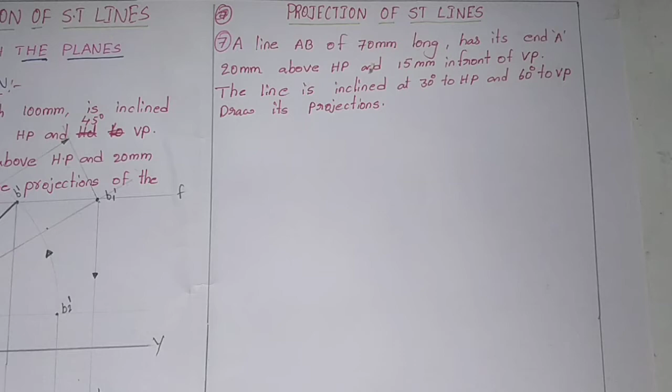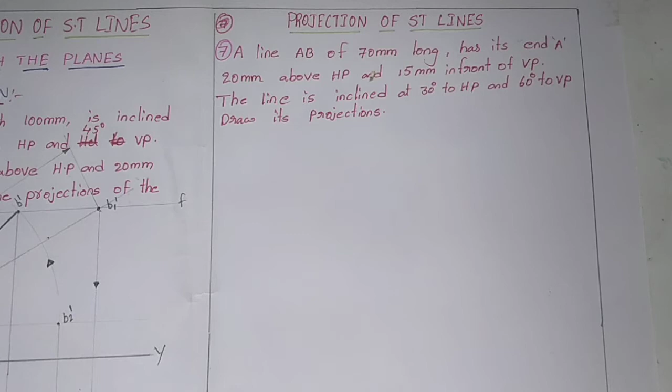Today I am going to explain how to draw the projection of a straight line when the front view and top view will get a straight line. When we get the projection of a straight line where front view and top view are a straight line, that means the angle, that is the inclination, between the true length of line AB with respect to HP and VP is 90 degrees. That means theta plus phi equal 90 degrees.

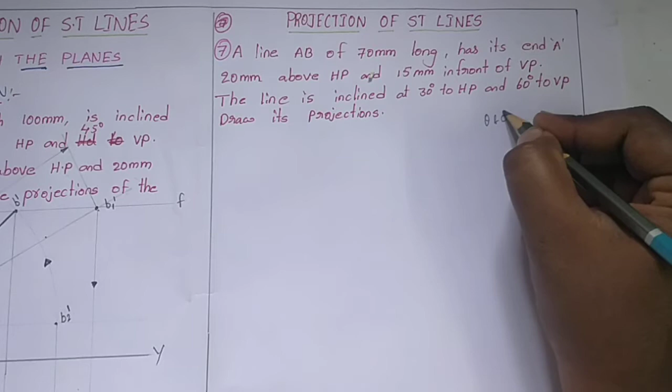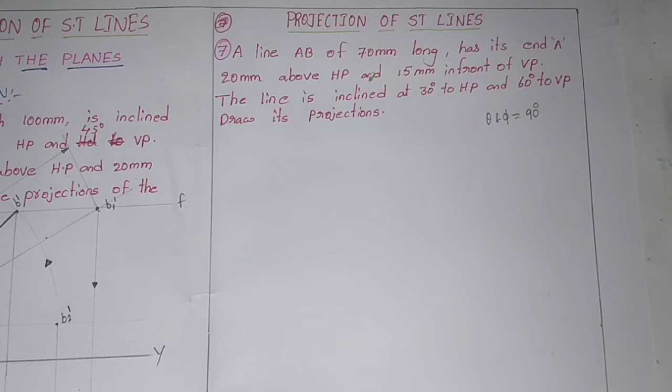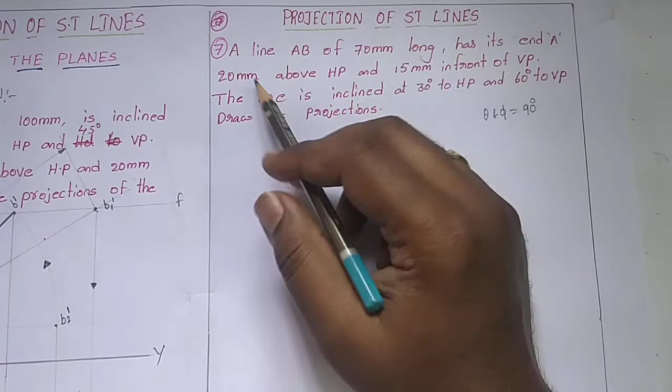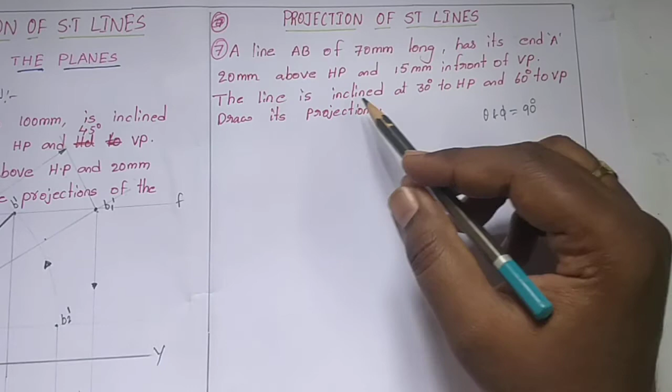At that time, the front view and top view projections are in the same line. That means A dash, B dash and A, B are in the same line. Okay. First go through the problem. Here the problem given is that a line AB of 70 mm long has its end A 20 mm above HP and 15 mm in front of VP. The line is inclined at 30 degrees to HP and 60 degrees to VP.

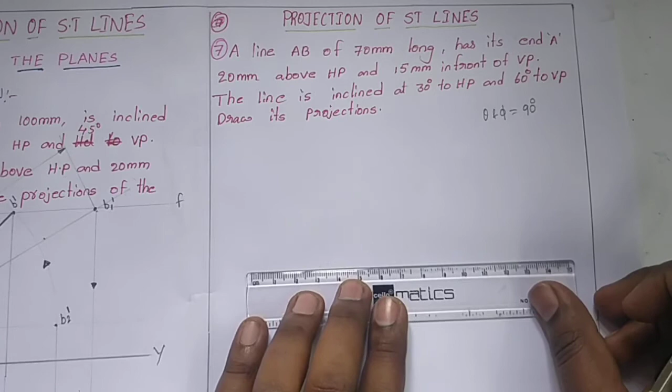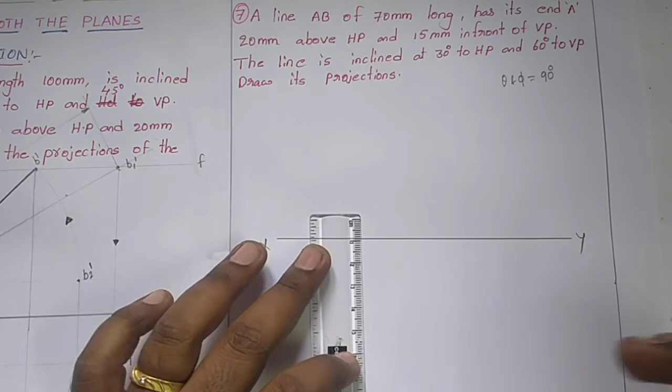Draw its projections. First, draw the XY line. Next, take any point on this. First, draw the 20 mm above HP line. Identify 20 mm above HP and 15 mm in front of VP. These are the points. It is A dash and this one is A. Now we identified the front view and top view of the start point of line AB.

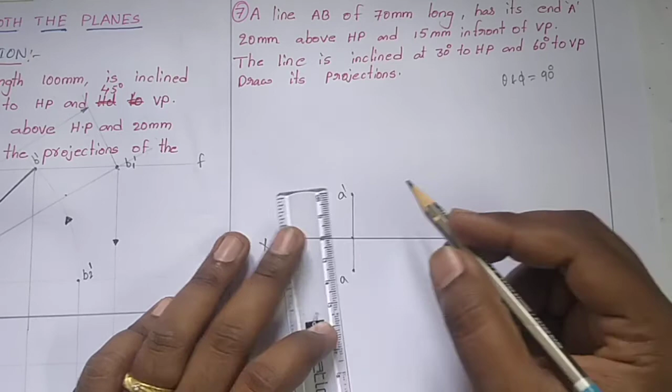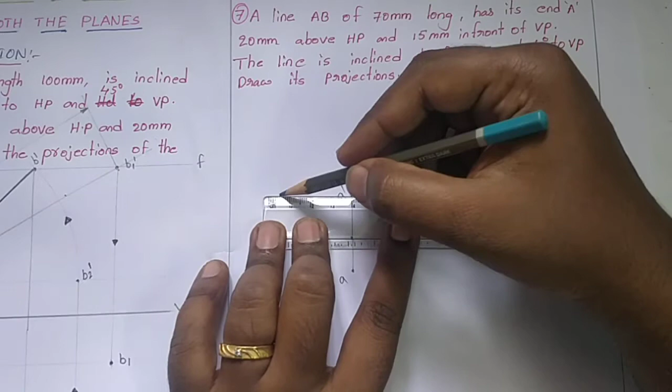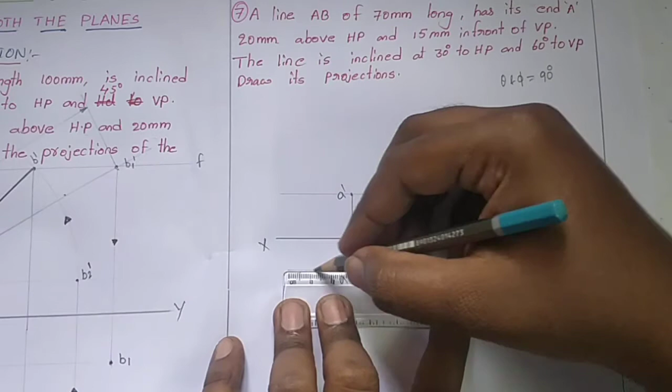Next, we need to identify the end point of line AB. For that, first we need to draw one horizontal line parallel to XY. It is known as locus of A dash. Next, similarly, draw one horizontal line parallel to XY through point A. It is known as locus of A. Next, 15 mm and 20 mm are completed.

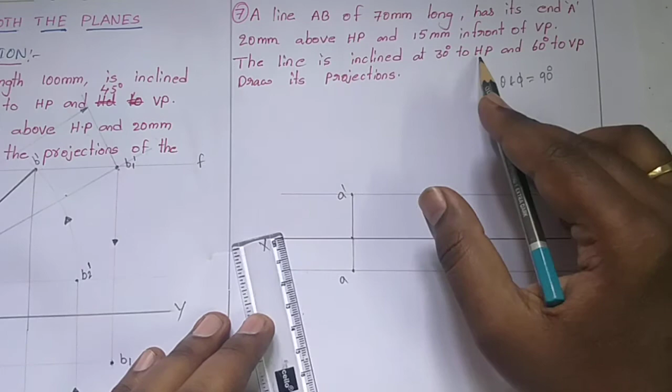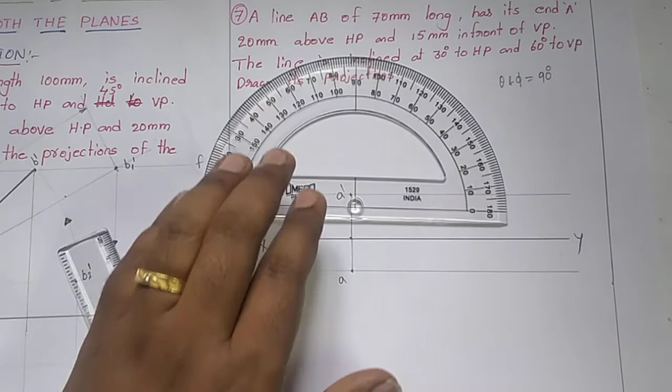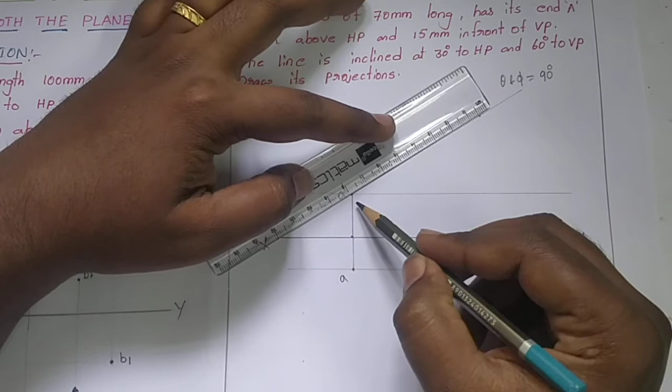Next, the line is inclined at 30 degrees to HP and 60 degrees to VP. 30 degrees to HP means we need to mark a 30 degrees inclined line from A dash. We need to draw the 30 degrees line. Okay, it is the 30 degrees line. On this line we need to measure the length AB, 70 mm. Okay, it is the 70 mm line.

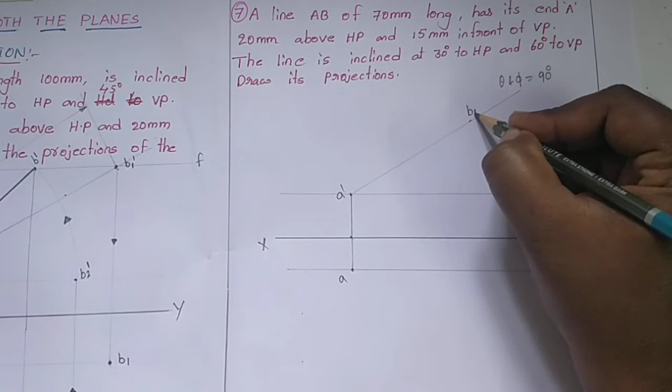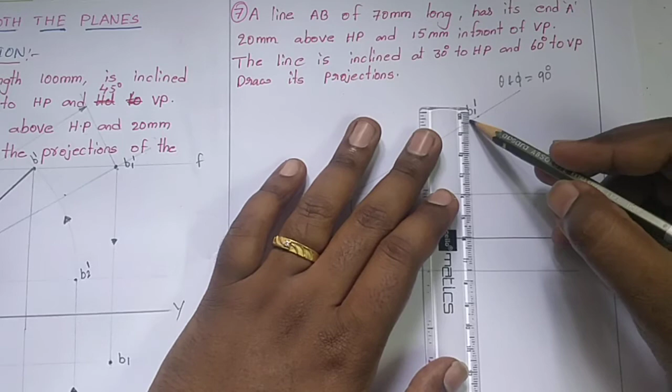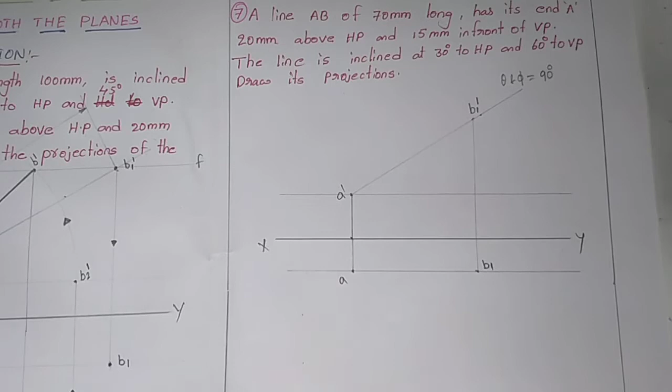This point is B1 dash. Next, from B1 dash we need to draw one vertical projection up to locus of A. We got one point. That point is known as B1. Next, we need to draw one horizontal line at point B1 dash parallel to XY. This one is known as locus of front view.

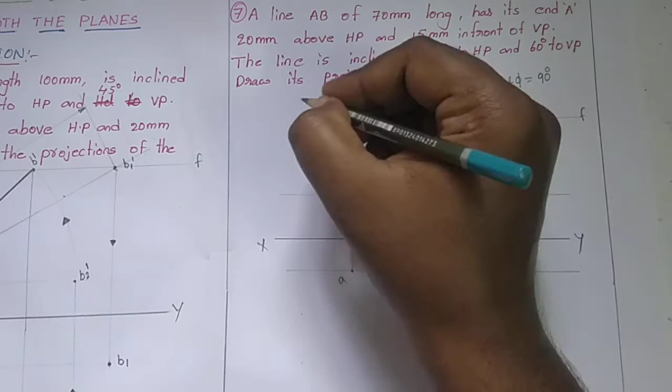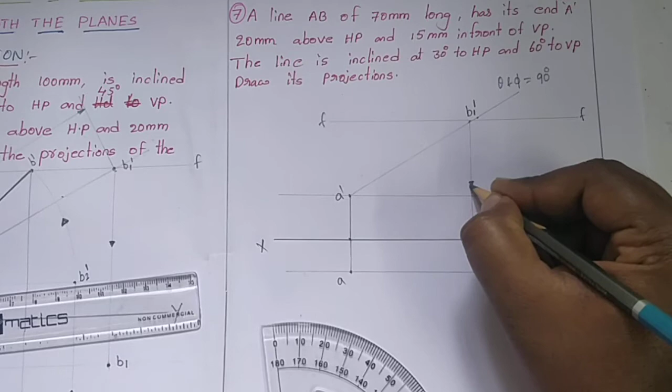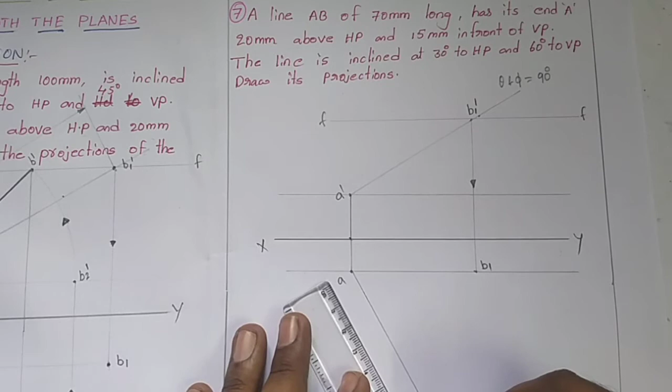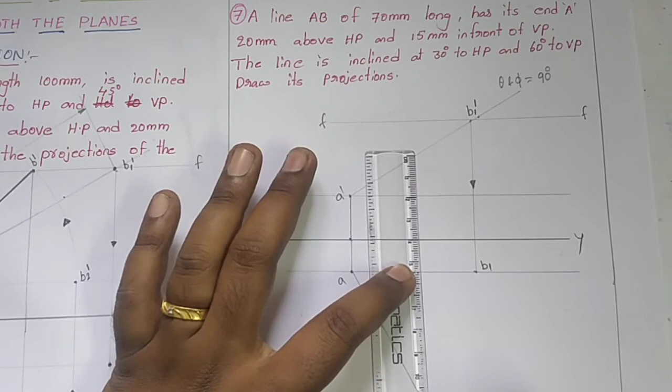Next, similarly, we need to draw a 60 degrees line from point A. On this 60 degrees inclined line, we need to mark 70 mm length. This point is known as B2. From B2, draw one vertical line perpendicular to XY up to locus of A dash. This point is known as B2 dash.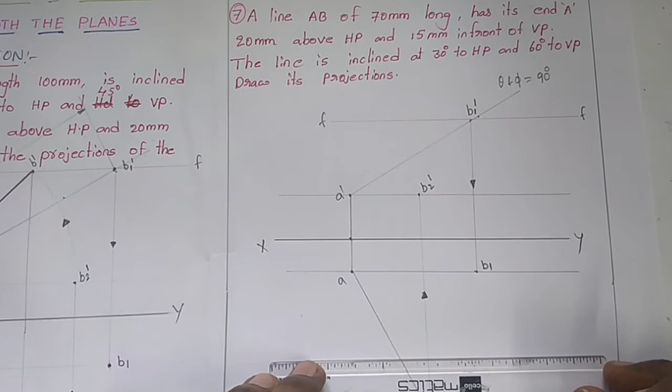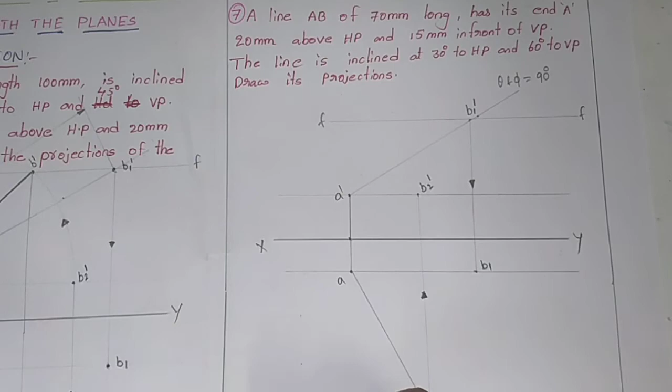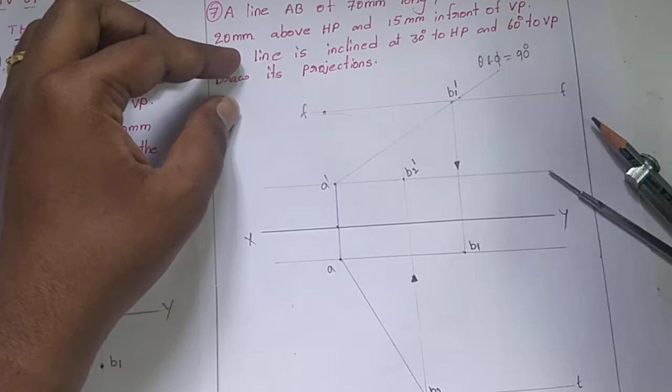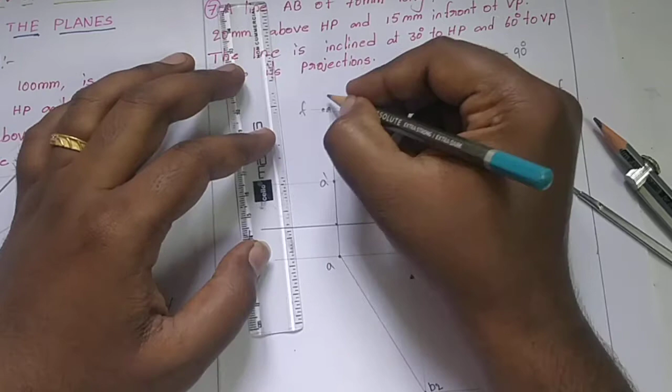Next, from B2 we need to draw one horizontal line parallel to XY. It is known as locus of top view. Next, using a compass, with A dash as center and A dash B2 dash as radius, draw one arc. It will meet the front view at one point. Actually, these two are at one point, exactly in this region. We got one intersection point. This point is known as B dash.

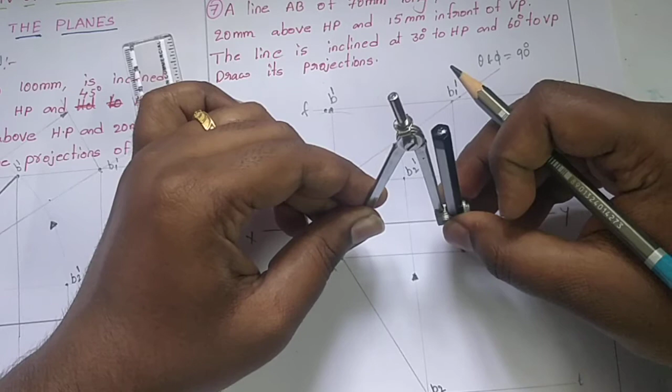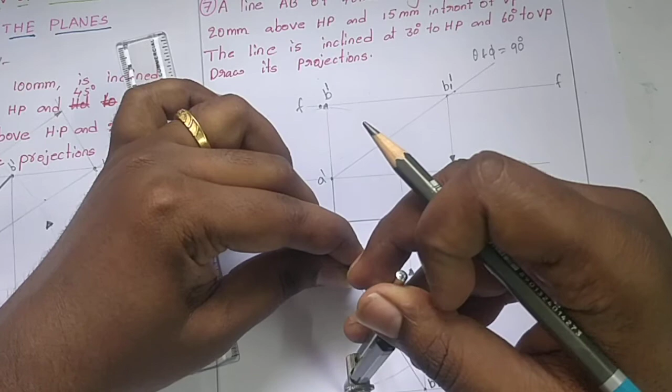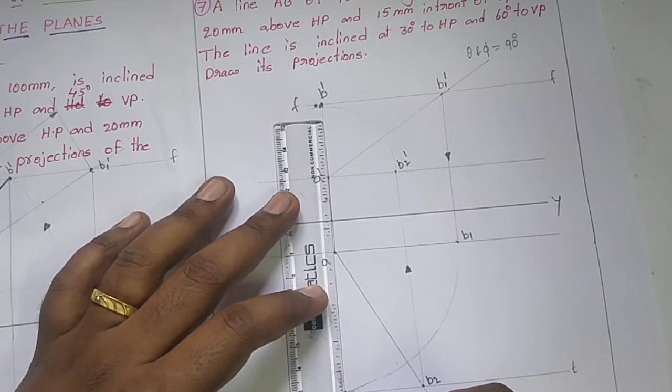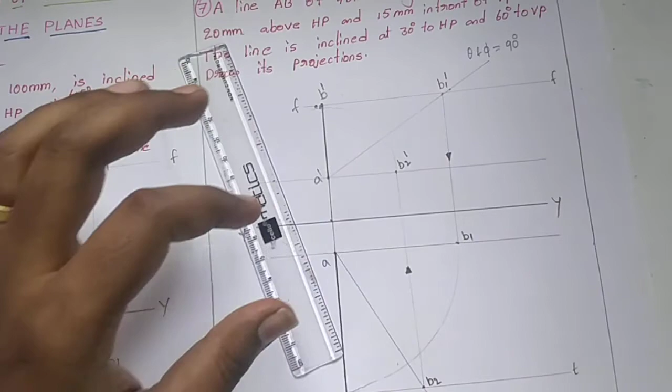Next, with A as center and A B1 as radius, draw an arc up to locus of top view. On the locus of top view, we got one point. That point is known as B. Now we got all the points. It is the top view, and this one is the front view. Here A dash as center, A B2 dash as radius. Like this we need to draw. It is the front view and it is the top view.

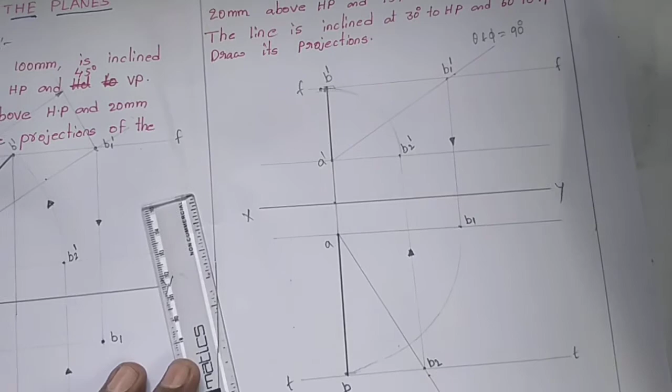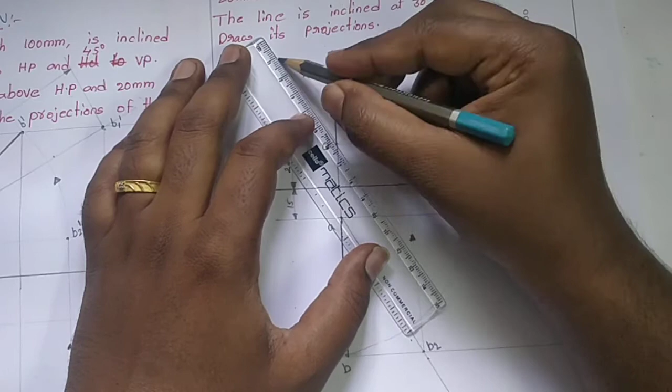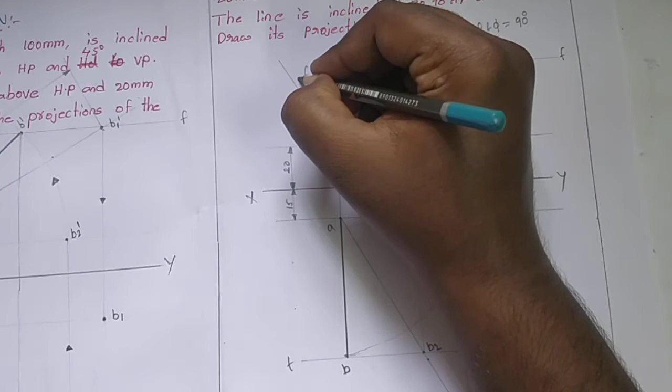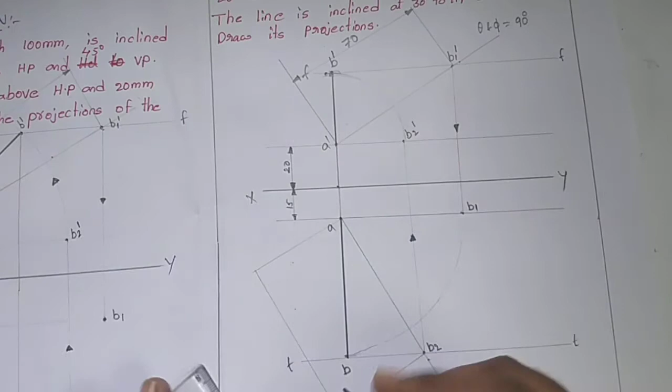Next we need to give the dimensions. This one is 15 mm and this one is 20 mm, and the length of the line is 70 mm. Okay, it is the 70 mm line.

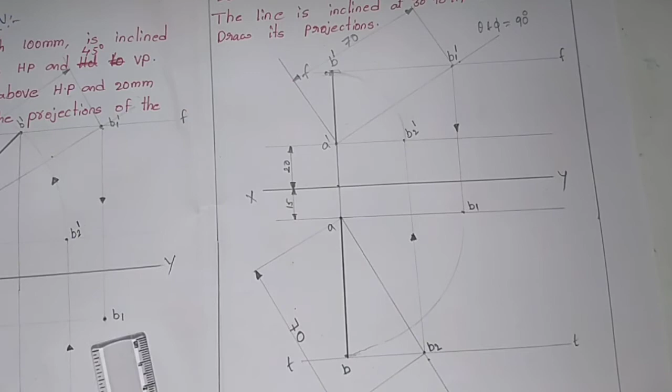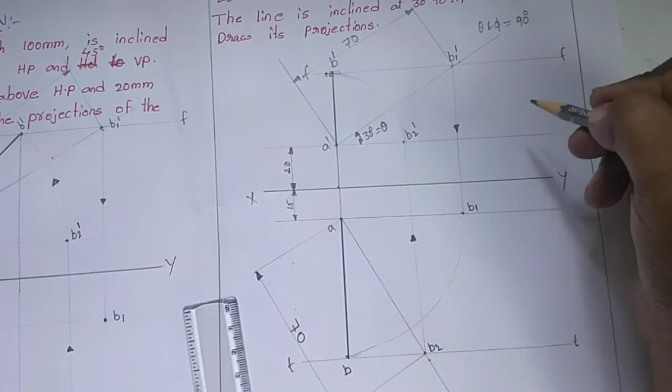Next, this angle is 30 degrees. It is given by theta. Theta is the angle between the true length of the line and XY. Similarly, this angle is 60 degrees. It equals phi. It is the inclination between XY and the true length of the line. Like this we need to draw the projections.

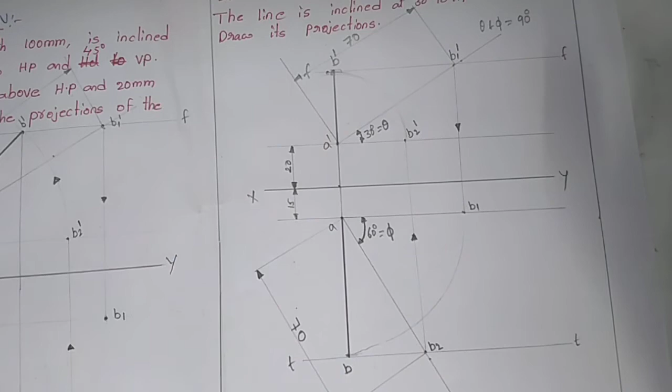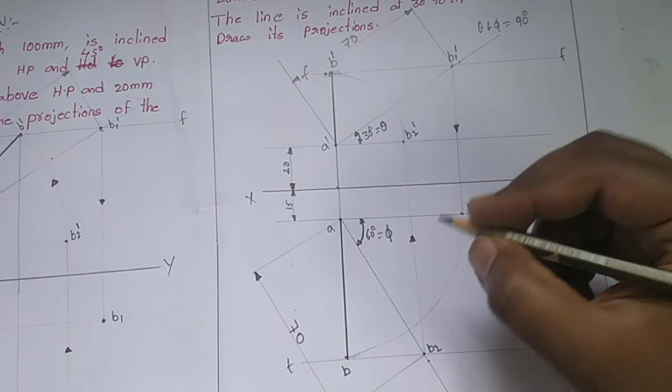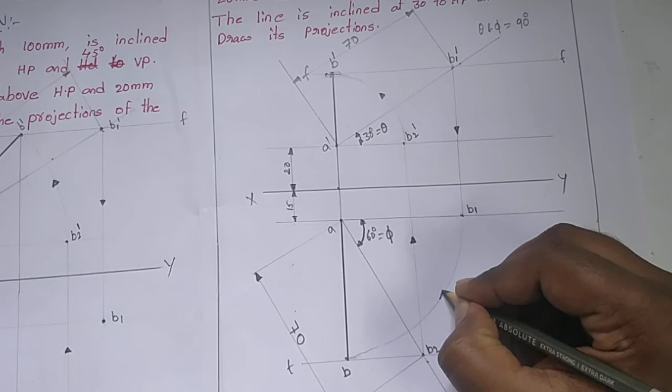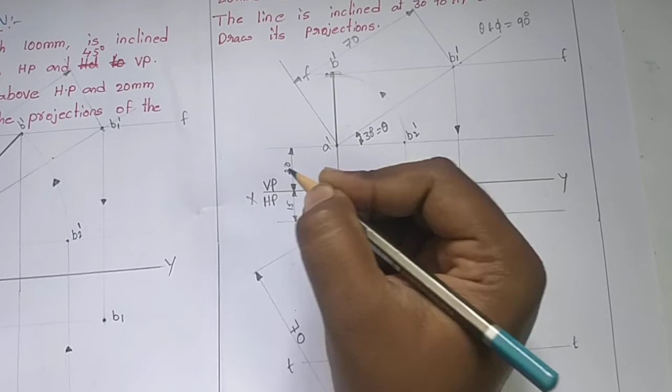When the angles theta and phi add up to 90 degrees, the front view and top view will be at 90 degrees, that means perpendicular to both the planes. That is, A dash, B dash and A, B are in the same projection line. Here with A dash as center, B2 dash as radius, we draw the arc anti-clockwise, and here clockwise. Above the XY line is VP and below the XY line is HP, because it is in the first quadrant. Okay, thanks for watching.